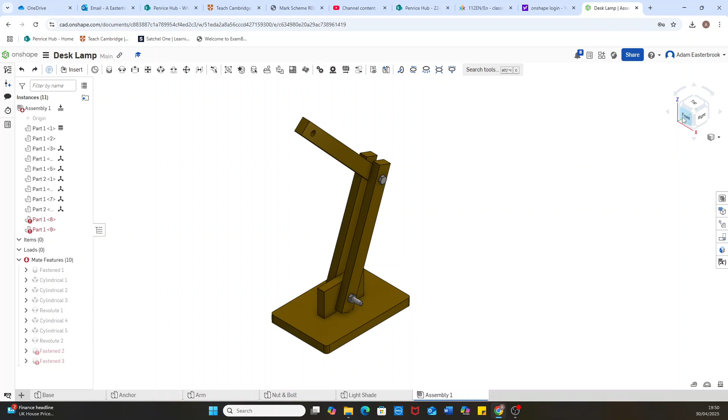Lovely. I'm just going to look at our assembly. I've gone back to my assembly to have a look at the view, and I think this would be best off sketched using our front plane.

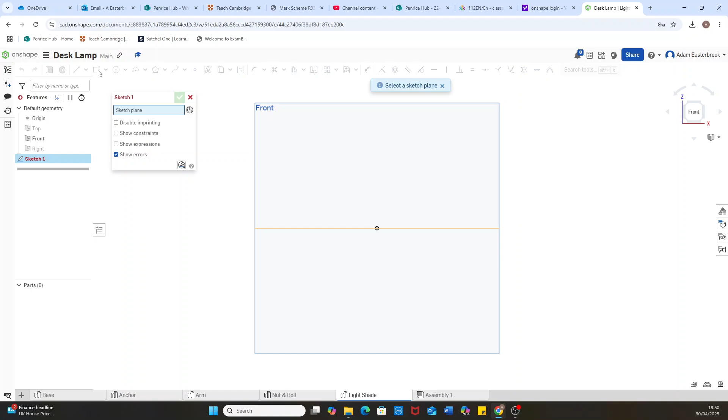So I'm going to go back to my part studio. I'm going to hide the top plane, the right plane, and I'm just going to be working on the front plane. I'm going to start by sketching a center point rectangle on the front plane. I've chosen sketch, clicked on front, onto my drop down, I want the center point rectangle, snap it to the origin, up and out.

Again, don't fall into the trap of trying to click on these little white boxes to put dimensions in. You can just hover your mouse towards them and it will toggle between the two of them. Once it's turned white, it's ready for you to add a dimension.

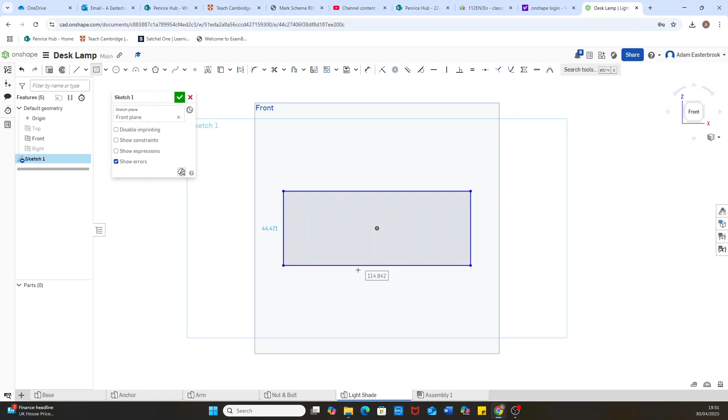So we're going to make it 100 millimeters long. And again, don't try clicking there because it will think you're making another center point rectangle. You're not. Just move your mouse towards those numbers, those dimensions, and it will go white and it's ready for us to type in. And we'll make it 50 tall.

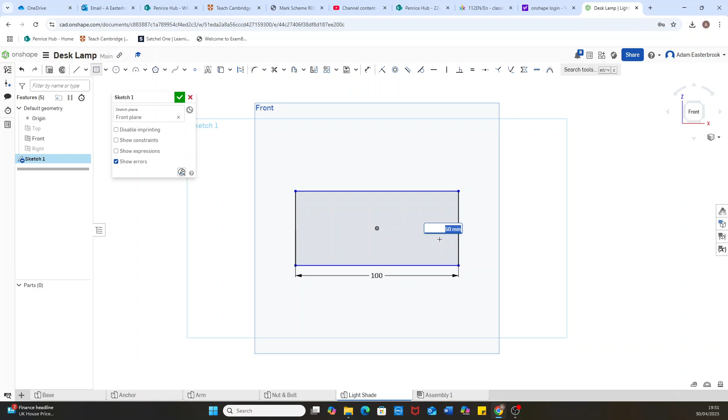I'm going to click on my dimensions tool at the top. I'm just going to remove those or move them off the sketch, tidy it up, make it really easy for you to understand what's going on. And I'm going to green tick that.

Next thing we're going to do is, I can't remember if we've used this before, we might have done it in year 9, but I can't remember. Anyway, we're going to use what we call the sheet metal model. So what this is going to do is take our sketch, we haven't extruded it yet, and we're going to tell the computer that we're going to be working with a piece of sheet material. The material I'm going to make my lampshade out of is acrylic, so it would be a piece of sheet material. As we know, acrylic comes in sheets.

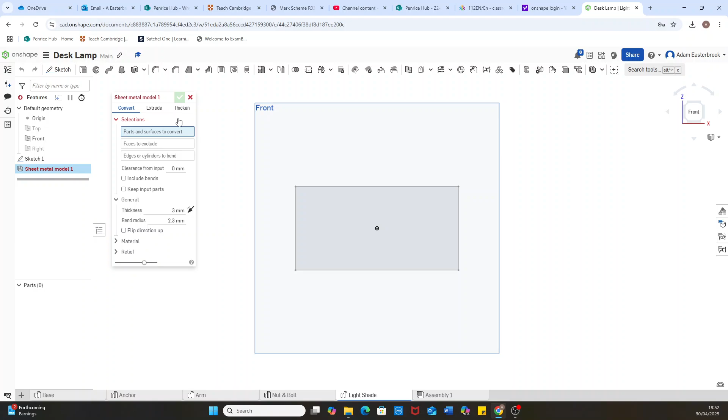So I'm going to click on my sheet metal model. Sorry, no, you have to click on the sketch first, then go to sheet metal model. And I haven't done anything yet, but if I just orientate my mouse slightly, you can see it's already given it a thickness, turning it into a piece of sheet material. Here you can specify how thick you want that sheet to be. The acrylic that we use is 3 millimeters thick, so I don't need to change any of these dimensions. So I'm going to green tick that.

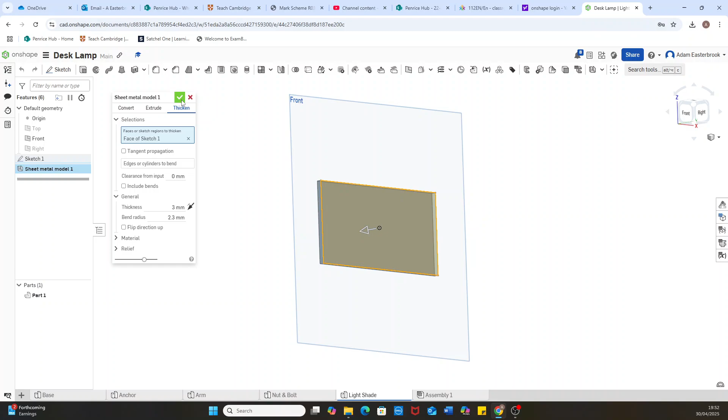I want my acrylic to be green, so I'm going to take my mouse down to part 1, right click, edit the appearance, and I'm going to choose green and green tick that.

Now the reason we've chosen sheet material and not extruded it is because with sheet material, like we can do with acrylic, when we heat it up we can bend it. Or if, for example, this was a piece of 3 or 2 mil aluminium sheet, again we could bend it. So I want to get that into my design.

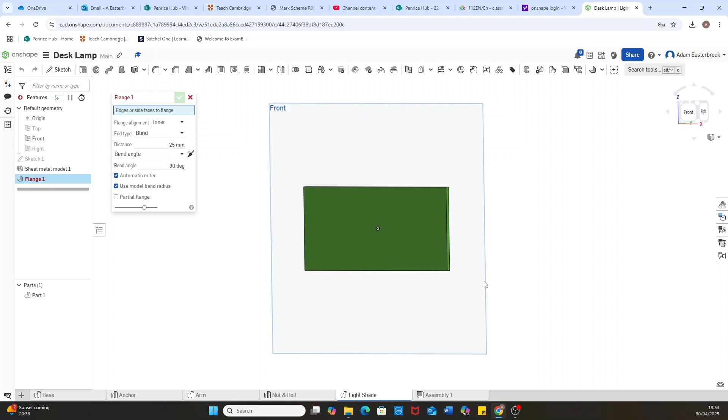So if I go back to my sheet metal model drop down, I've got this flange option. Funny name, funny word. What I can do, and I'm going to zoom in on this corner here, it's gone orange, and I'm going to click. And if I zoom out and change the angle, you can see what it's done is put a bend on the edge and added a little bit more material to it.

Here you can change the bend angle. I want to keep mine at 90. But just to show you, because you might want to use this feature in other products that you design, if I changed it to 40 for example, it changes that bend angle.

Let's move it back to 90, and up here I can tell it how much distance or extra material I want it to add on after that bend. Let's put it up quite drastically, let's put it to 60, and you can see what happens. I'm quite happy with 25, so I'm just going to leave it on 25.

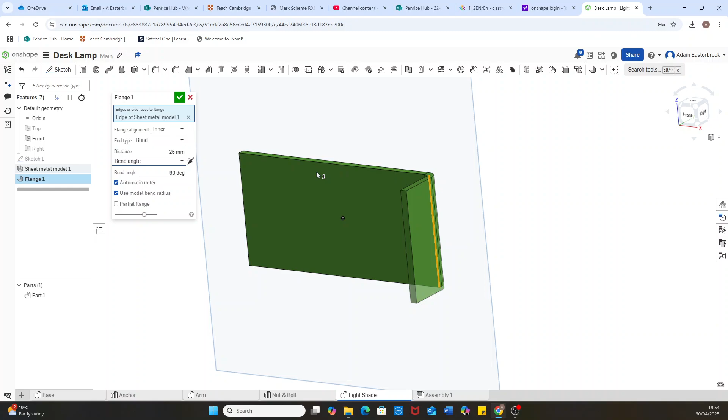That's that side done. I'm holding down my right mouse button and reorientating my view so I can catch this inside edge and add my second flange. I don't need to change it from 25mm, and I don't need to change the angle.

That's me done, green tick. I'm quite happy with how that looks, and that's that sheet material - it's called sheet metal model. Think of what material we're using: we're using acrylic sheets, and we can bend acrylic. We can bend 1mm thick aluminium material quite easily.

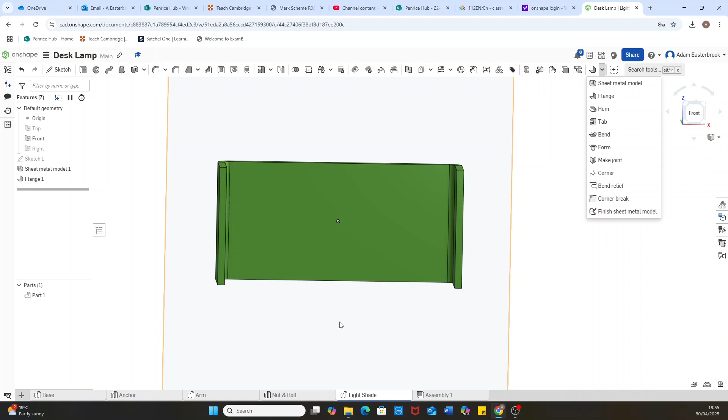Okay, that's that bit done. The next bit I'm going to do is create the little LED strip lights. They're very easy - some of you might have these at home in your bedroom, or come across them in things like gymnasiums. We're going to design our strip lights so we can add that to our assembled model. So I'm going to go into a new part studio.

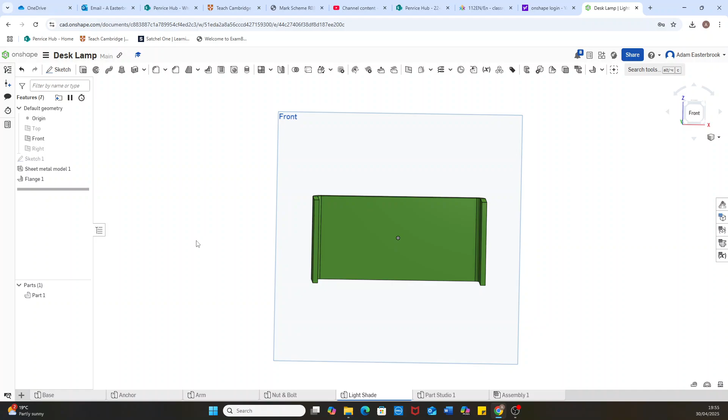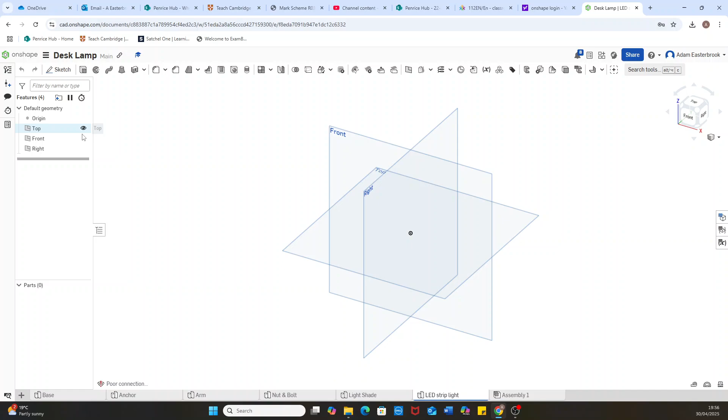Here it is down the bottom. Right click my mouse, choose rename, LED strip light. I am going to use the top plane for this, so I'm going to hide the front, hide the right plane, just keep it nice and tidy for me and easier for me to work.

So we're going to start with a center point rectangle. Hopefully by now some of you are realizing there's more than one way to get to what you want to do - you can just right click on this plane and do new sketch. You don't have to go up here and click new, you can use the shortcut keys on your keyboard. So I want to choose center point rectangle, snap it to the origin, create a rectangle shape.

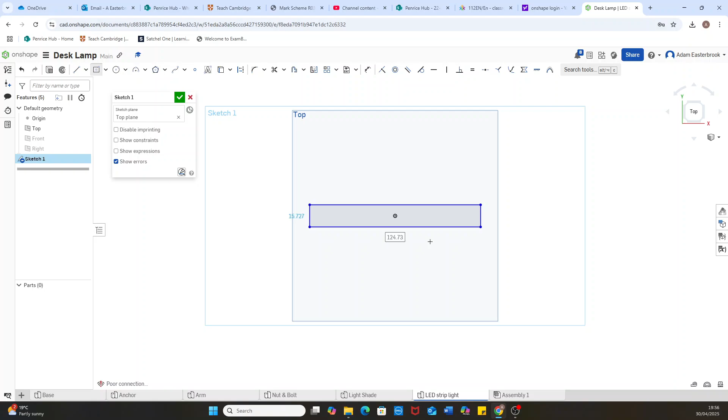That box is nice and white for me, ready for a dimension. That's going to be 80mm, press enter, and that second one is going to be 10mm, press enter. Quite happy with that, I'm going to green tick that.

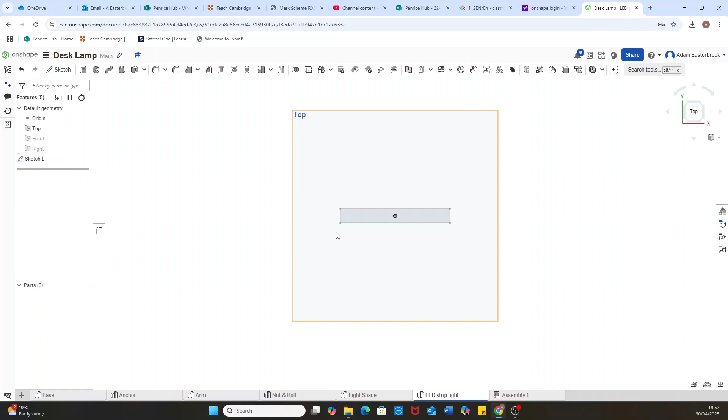Let's change our sketch into a 3D object. So I'm going to right click on my sketch and choose extrude. LED strip lighting is like 1mm thick, it's not very thick at all. Happy with that, green tick.

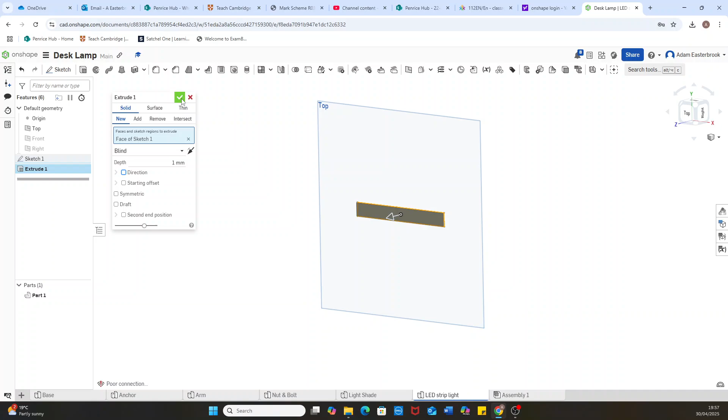I'm going to come down to my parts here, right click, edit the appearance. I'm going to make it as white as I possibly can. That'll do for what I want.

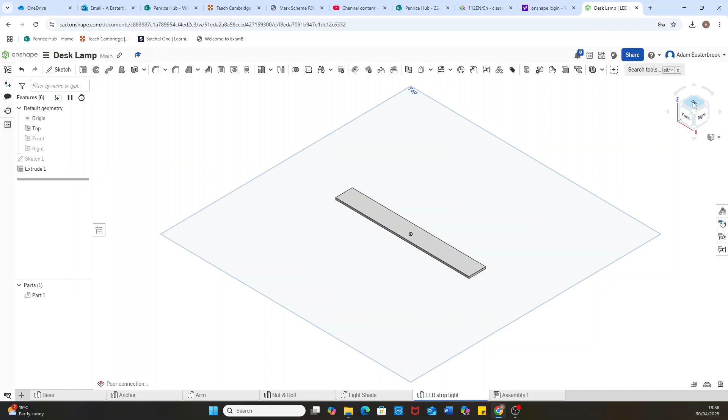Now we need to sketch the little LEDs - these are the bits that actually light up and give the light. What we've created there is the strip, the plastic strip that holds the electrical components, that allows electricity to pass through and reach the LEDs. So let's reorientate my view so I'm looking straight down on top - that's what I find quite easy.

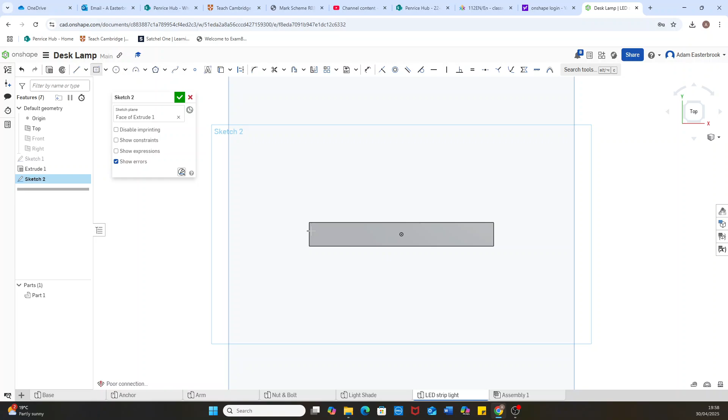And we are going to sketch a center point rectangle on the face here. So sketch, choose the face of this rectangle, go up, choose your center point rectangle. Now I'm going to zoom in so you can see exactly what I'm doing. I want it to be centered. I'm going to make these 3mm by 3mm, 3 by 3. I'm not going to green tick there.

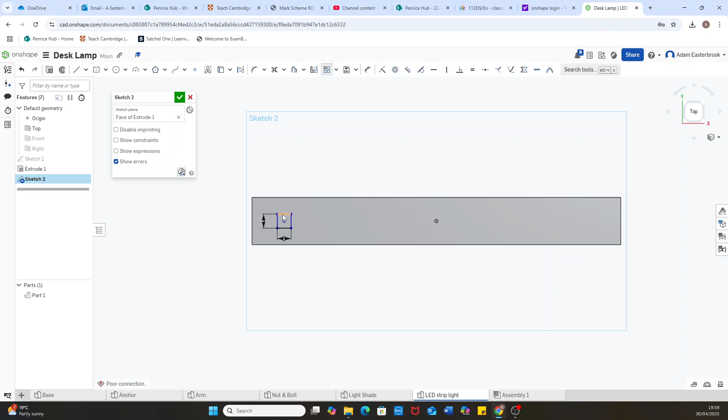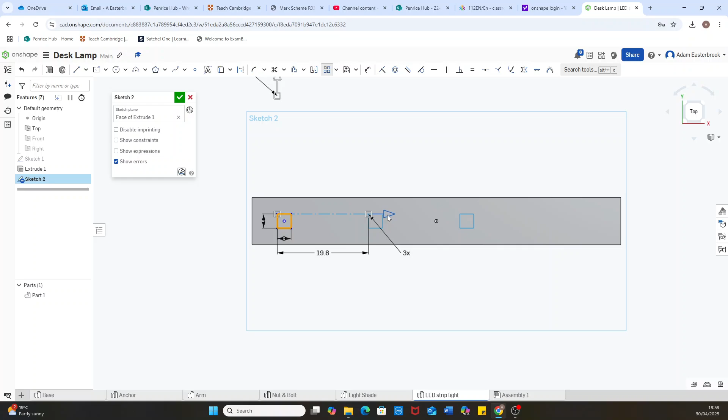I'm going to use our pattern tool, a linear pattern tool - we did this before when we created our USB cable. So I'm going to click linear pattern, click on the top right side of that square, the bottom side of it, and you can start to see it's creating that pattern. I don't want these LEDs to be as spaced out as that, let's bring it down a little bit. Be careful, I want them nice and straight. That's about right.

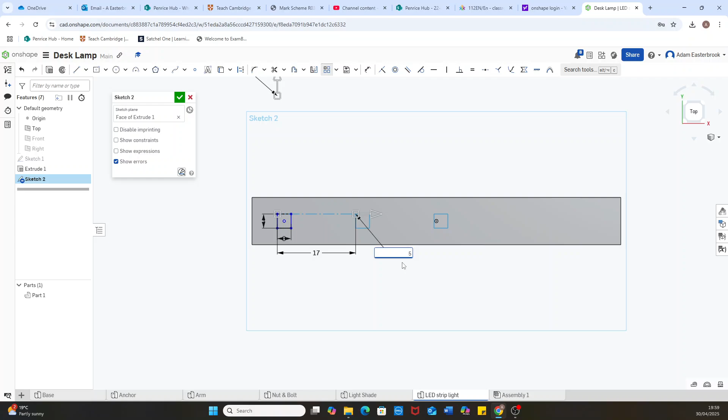So you can do it manually, or to be really accurate you could type in, for example, let's try 17 - we might need to change this number in a minute. And I don't want it to repeat 3 times, let's do 5, there we go. Let's move it in slightly from the edge so it looks a bit neater. So I've actually set that to 16.5mm as the distance between each square, and I've repeated that square pattern on 5 occasions. I'm quite happy with that, green tick.

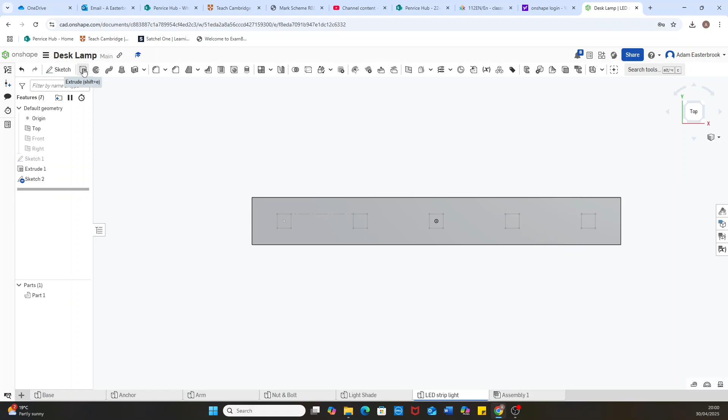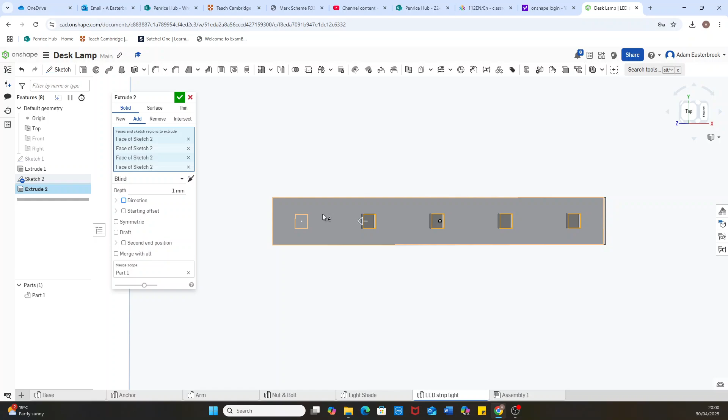Next then, let's create some colour to these. We need to make them into 3D objects, so go up and hit extrude, click on 1, 2, 3, 4, 5 squares. If I change my view, you'll see it is defaulted to 25mm - that won't look right, as you can see here. Let's knock that down to 1mm, and I'm going to green tick that.

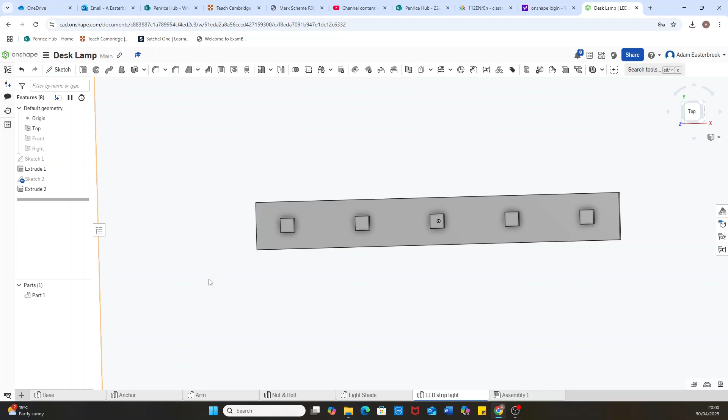I don't know what's happened to that - I obviously didn't quite catch this square here. Not a problem, double click on extrude and just click on that one there. Green tick. I want to click on that one, that one, that one. Actually, there's a better way of doing this.

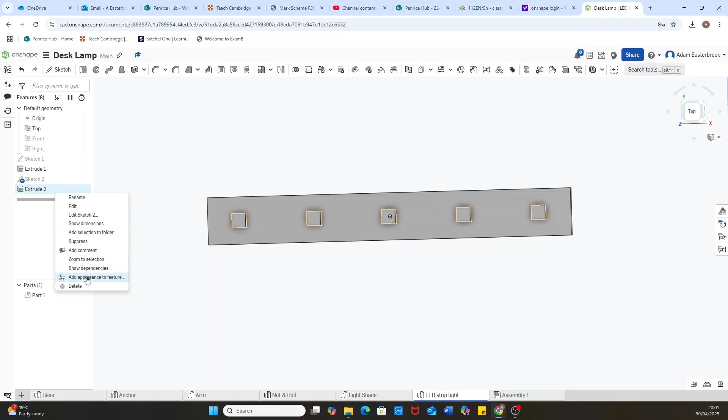So what I want to do now is make these all look like they are yellow, or there's light coming out of them. So I'm going to right click on the whole extrude that I've just created, right click, and add appearance to the feature, and there we go - you can change the colour. You can have a different colour LED, it doesn't have to be white, it could be blue, it could be orange, anything you want. I'm going to stick with that. So there's my LED strip light and my light shade.

I'm going to pause the video there and I will show you how we're going to assemble those two features onto our design.